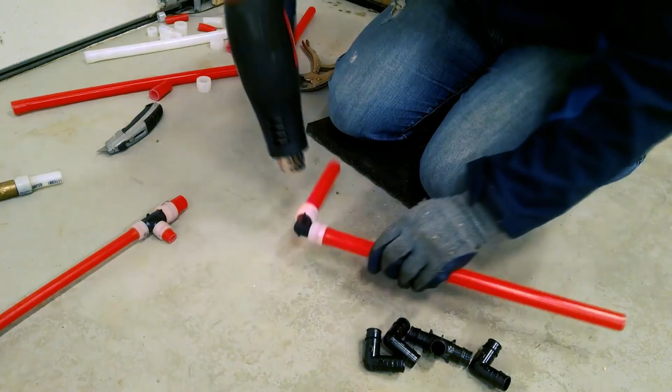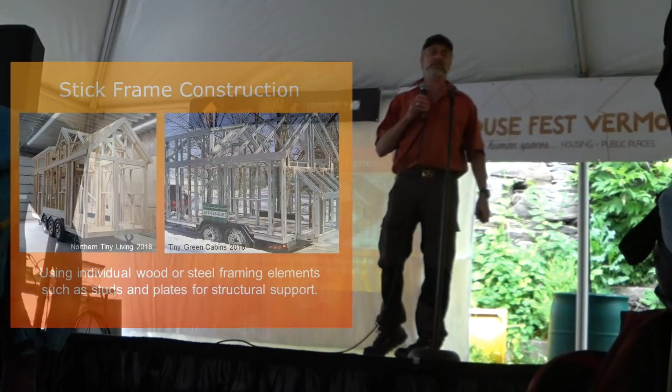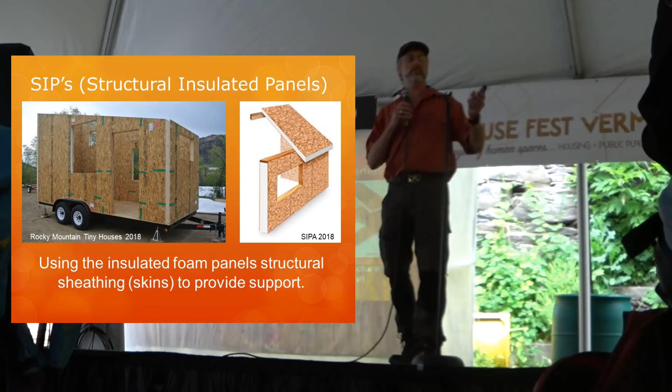There's a couple different ways you can frame up or build your tiny house walls. One is stick frame, with either wood or metal. There's some advantages and disadvantages of both, and we'll take a look at them. The other would be using SIP panels, structural insulated panels. Typically those are foam filled with a skin on the outside acting as the structural element for the walls. We'll talk a little bit about their advantages and disadvantages.

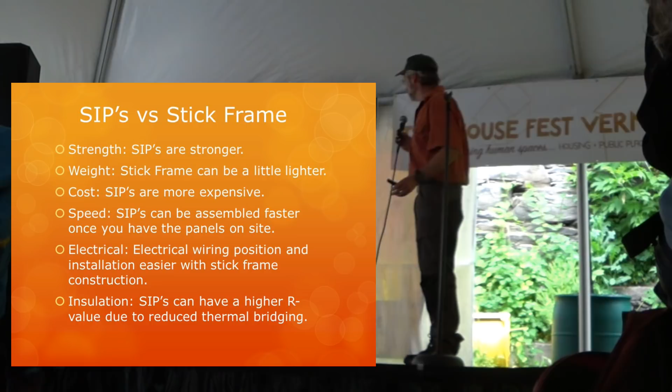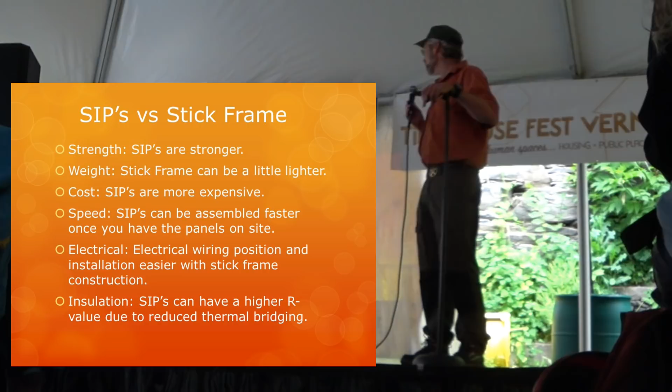In comparison to SIPs versus stick frames, SIPs are stronger just because of the way they're built. They're all integrated and tied together a little bit more, so it tends to be a little stronger. Weight, you'd think SIPs might be a little less weight, but actually folks who've put together their tiny houses have found that stick frame typically is a little bit lighter than a SIP panel. Costs, the SIPs are going to be more expensive. They're pre-manufactured, but on the other hand, they go together quicker because basically you're just screwing some panels together instead of framing up the entire building.

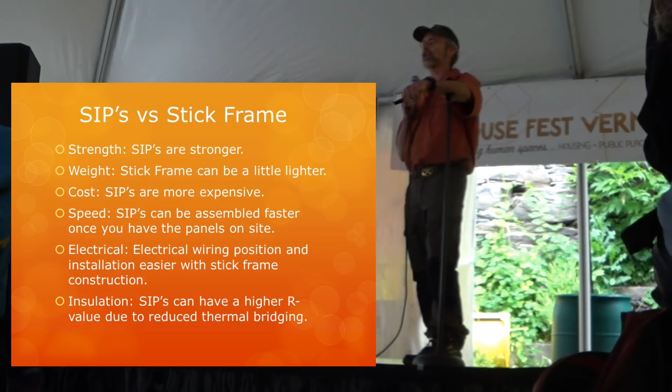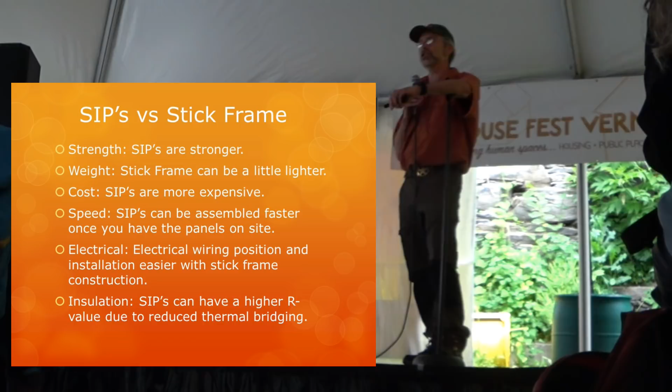The electrical, if you're going to change things down the road or modify things, it's a little easier with a frame because you're running it through the studs itself. With the SIPs, you'd need to route out some new channels or do some surface mounting if you're going to change where your electrical locations are. And in terms of insulation, SIPs can also have a little bit more insulation. Sometimes they're a little bit thicker, and we'll get into some of the different insulation systems as well.

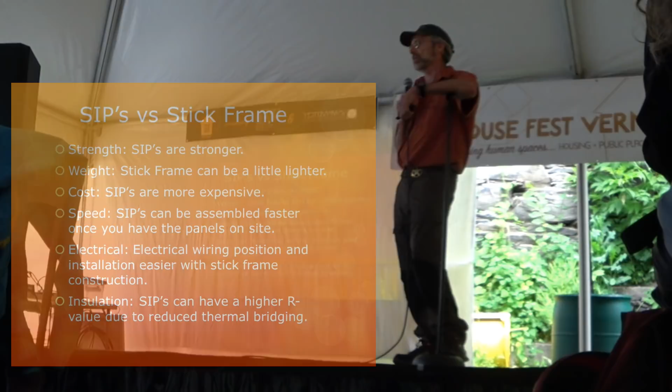So wood or steel? Well, in terms of weight, structural steel frame can be 40 to 60% lighter than wood. So weight sometimes is an issue, maybe your trailer has a maximum weight rating, so sometimes steel can be good for that.

But in terms of cost, wood is typically 2 to 3 times less expensive than steel, just because of availability and it being easier to put together. A lot of the structural steel frames, people are buying basically the frame and then building the house up from that, and that's going to certainly add to the cost a little bit.

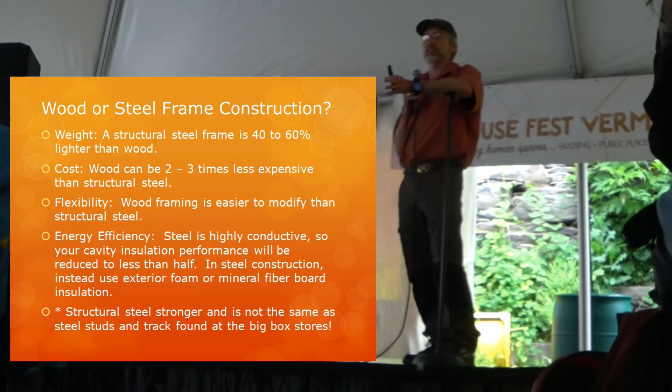Flexibility, if you need to reposition a window or change the structure itself, wood is a little bit easier to modify than steel, particularly if you have somebody prefabbing the steel system. In terms of energy efficiency, we have to remember steel is very conductive, and the rule of thumb is if you put your insulation into the cavity of that steel frame, you're going to reduce the insulation by half. So that's a pretty big downside.

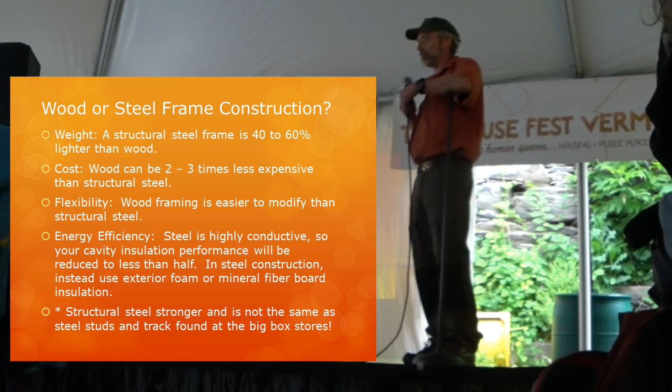So typically when we're doing steel frames, we'll actually be looking at exterior insulation systems like exterior foams, or board rock wool panels would be another option. When we talk about structural steel, we're talking about something different than if you go down to Home Depot or Lowe's and purchase steel. There's a couple folks here with some steel frames you can take a look at. Those are pretty beefy in comparison to some of the other ones you might see.

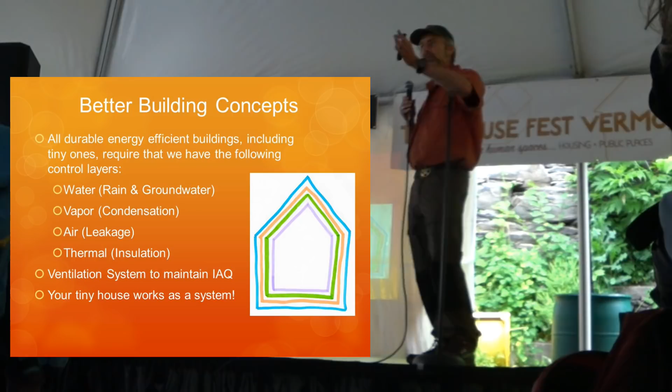When we're building these things, we have to think about this as your wall system, your roof system, and your floor system as well. They're all kind of layers that need to go on there. So we need to control and keep the rain from getting into our siding. We don't want things to be rotted out.

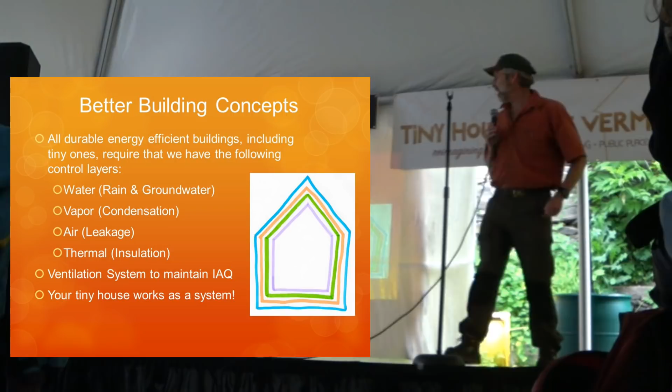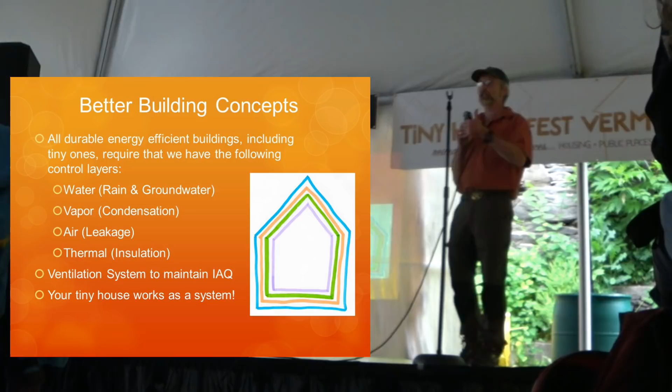We don't want things to be rotting out. We may need to take into account vapor or condensation, and that will depend on the type of insulation we're thinking to use. Air leakage—we don't want the thing to be drafty, and we want it to be more energy efficient, so we want the envelope to be as tight as possible. We're going to be putting our thermal insulation either inside the frame or outside of the frame, depending on our insulation system. We want to make sure we have a ventilation system because we don't want to create problems. We want a real tight, energy efficient envelope for comfort and energy use, and yet a healthy indoor environment by having our active ventilation system.

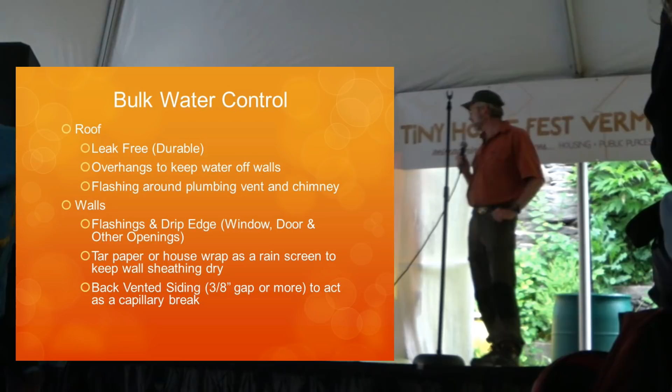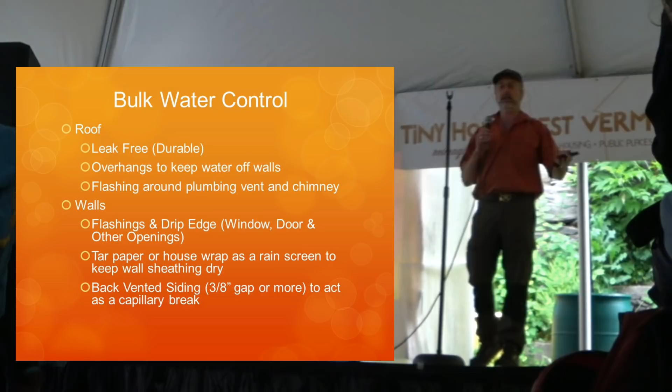The tiny house, as all houses, needs to work as a system. Bulk water control—we're going to make sure we've got flashing and drip edges on our walls, around the windows and door, and other openings. We're going to use some tar paper or house wrap on the other side as a rain screen. So the rain screen means any water that gets through our siding will have the ability to run down the side of the building without getting into the frame, into the sheathing, and rotting things out over time. And then we're going to back vent our siding.

We have some products over here. If you take a walk around, you see these fuzzy looking black things on the outside of the building—that's the rain screen. It gives a capillary break so that when water comes through the siding, at some point it now has a pathway out.

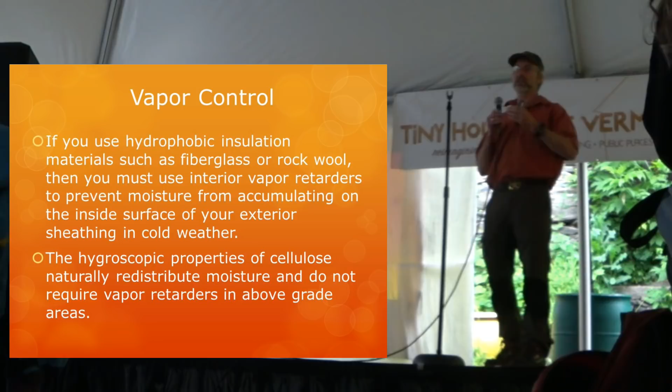Vapor control depends on the type of insulation we're using. If we use hydrophobic insulation like fiberglass or mineral fiber, we have to think about vapor control, because if we don't, we're going to have problems with interior moisture going through our insulation, hitting the exterior sheathing, and condensing. If we're using something like cellulose, which is hygroscopic, it has the ability to disperse this moisture and not let it form on the outside. So if we're looking at fiberglass or rock wool, we have to think about putting a vapor retarder in there. Otherwise, we're going to have durability issues over time, particularly in cooler weather.

Air leakage control—again, we don't want drafts coming in during winter when the wind's blowing. We want a nice tight building with air leakage control because we don't want uncontrolled air leakage bringing moisture to areas where it could potentially condense and turn into rot and mold over time. The easiest method we've found for creating an airtight building assembly is to air seal the exterior sheathing, because there you have the least number of joints.

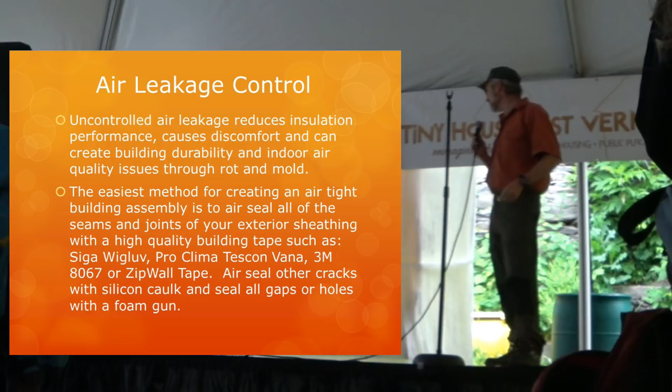So you're going to be doing your air sealing typically from the outside of the building, before you put on your rain screen, and maybe even before your building paper if you're using plywood or OSB. Typically you're going to use some real high quality tapes with an acrylic adhesive, applying these at the joints or seams of the building before your siding goes on. Then you're going to air seal the other cracks with caulk and gaps with a foam gun—again, making that envelope as tight as we can.

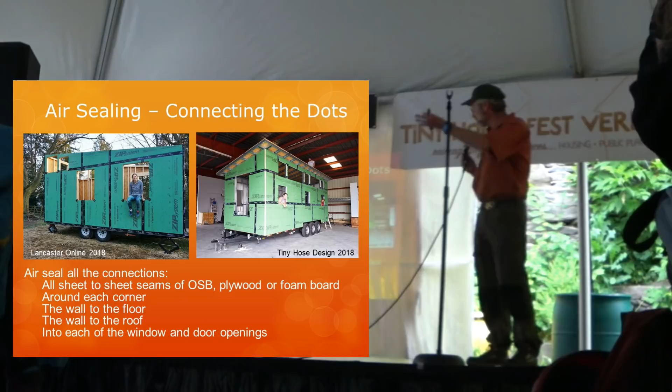So air sealing is all about connecting the dots. We want to make sure that before we cover this up, all of those seams are sealed. We're also going to make sure we tape around the corners of the walls, the wall to the roof, and the wall to the floor. We want all those connections all the way around—continuous from the top all the way to the bottom.

Insulation options: you could have bats, boards, sprayed on, or blown in. It's very difficult to actually achieve good cold weather performance, and also really hot weather performance, with bats.

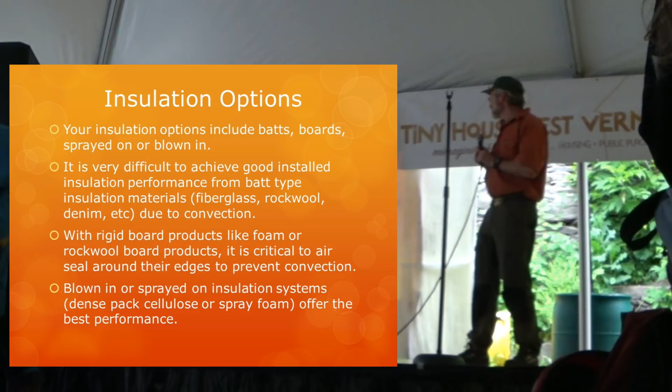I'll talk about convection a little bit here. It's a real issue. We've done a lot of work with the infrared camera, and on a cold day, it's not uncommon for your wood element in a wall to actually outperform your insulation because of this convection that's going on there.

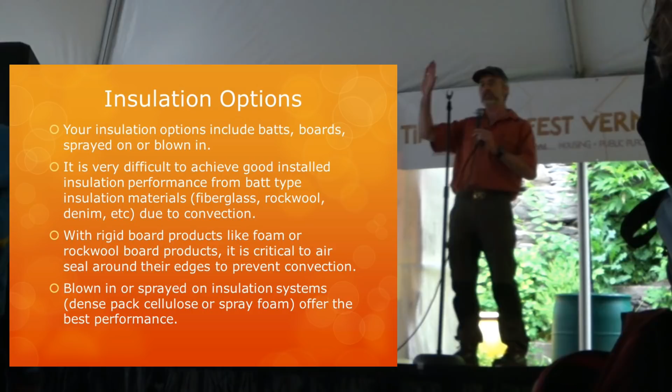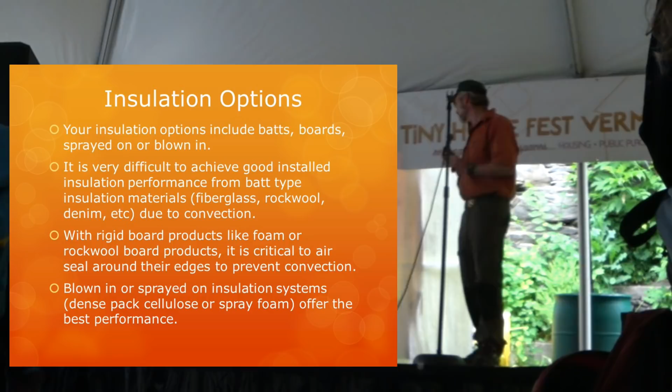Rigid board products like foam or rock wool board, when we're putting those on, we also want to be air sealing or making sure those connections are nice and tight, with no gaps around them or under them where we could get convection bypassing our insulation. Then there's blown in or sprayed on insulation, like blown in dense pack cellulose, or spray foam, spraying on open or closed cell foam.

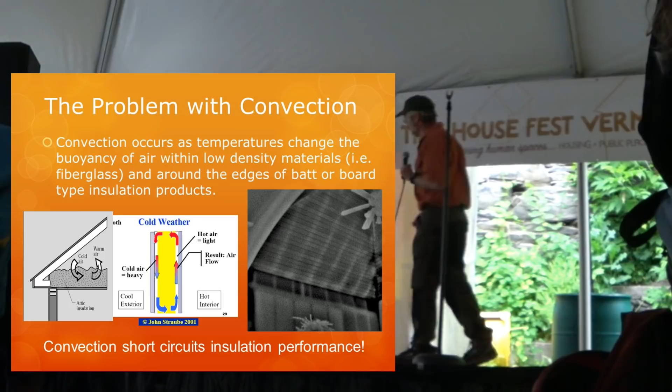Real quickly, the problem with convection is whenever we use a batt, what we find is that in the wintertime we've got warm air on this side, it heats up the air at the interface between the batt and the inside wall. It starts to rise, the air becomes more buoyant. You have the same thing going on on the cold air side. That creates a convective loop, which is basically bypassing your insulation. And when it does that, you're not getting the performance out of it. You're going to have issues.

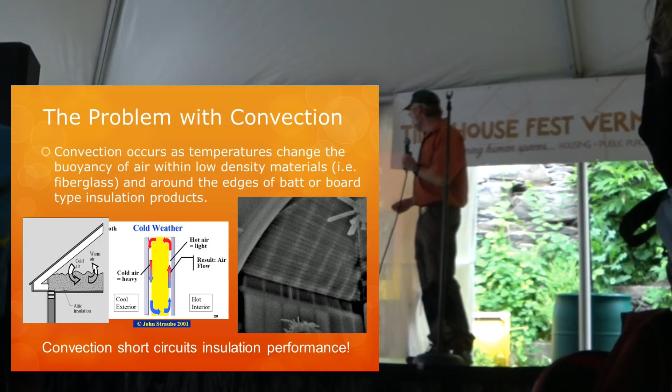You can also transport moisture and other things around that. So batts are just not the best option for this. Even if you try to install them really well, there are some issues with that.

Some of your insulation decisions: is your insulation value stable over time? A lot of these foam products use inert, lower conductivity gases, but unfortunately these things do seep out or leak out over time. So they experience what's called thermal drift.

Also, can your insulation help increase the tightness of the building? Some of the denser products, like the foams and the dense packed cellulose, will actually slow down or prevent air leakage from getting into the building. I don't want to say they're always the perfect air barrier, but they can certainly help the tightness of the building.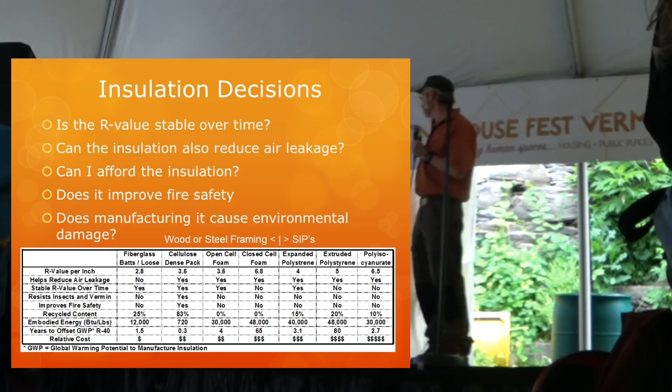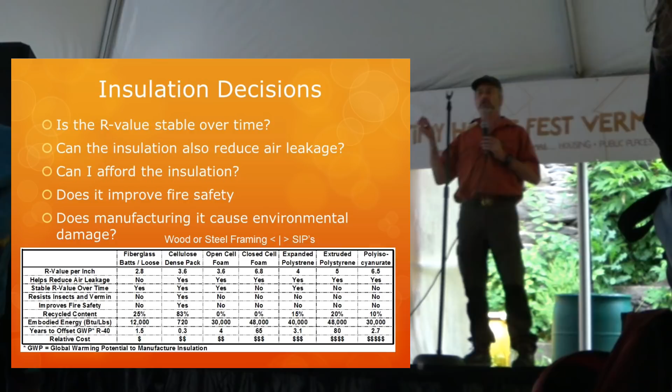Does it improve fire safety? The one issue I'm a little concerned about these days with some of the foam products in particular is they are very flammable and produce a lot of toxic combustible smoke. So if you're using foam in these buildings, we have to make sure we have a 15-minute barrier in front of them to give you some protection inside the building. The nice thing about the tiny house is you're not too far from, hopefully, the doorway there.

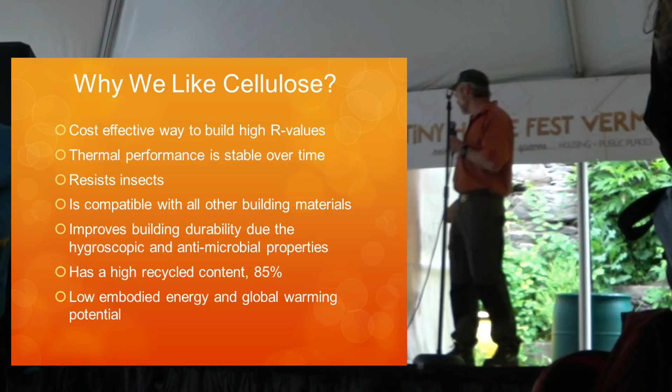So I do a lot with dense packed cellulose. It's just proven to be very, very reliable. It's very stable over time. It's definitely a cost-effective way to enhance or build higher R-value buildings. We've used it in a couple of tiny houses, including a super insulated tiny house I'll show you. It also resists insects, is compatible with other building materials, has the hygroscopic properties we talked about, high recycled content, and low embodied energy.

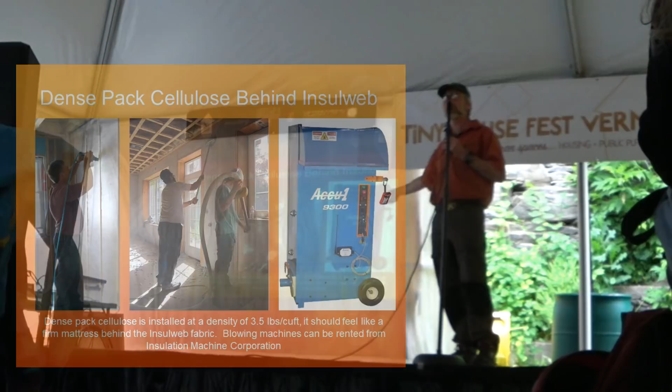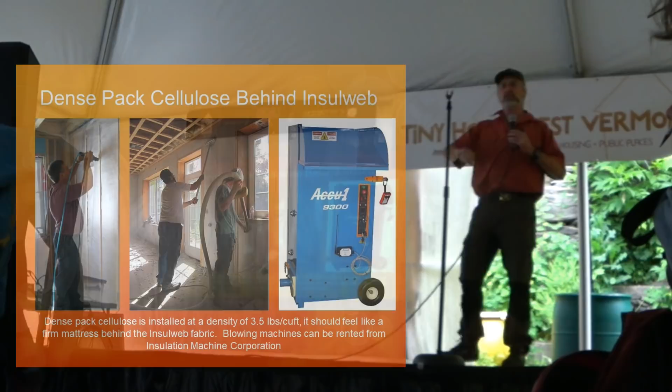Next slide. So if you're going to do cellulose, you'd basically be using a machine such as this. If you're lucky enough to live in Vermont, New Hampshire, or even Massachusetts, we have availability of these machines. In fact, this particular manufacturer, no matter where you are, will rent you a machine to do this. Basically it involves stapling up this material called Insulweb, which looks like the material underneath your box spring or sofa if you lifted it up. Then you're injecting the cellulose in, and we call it dense pack because you're putting it in at 3.5 pounds per cubic foot.

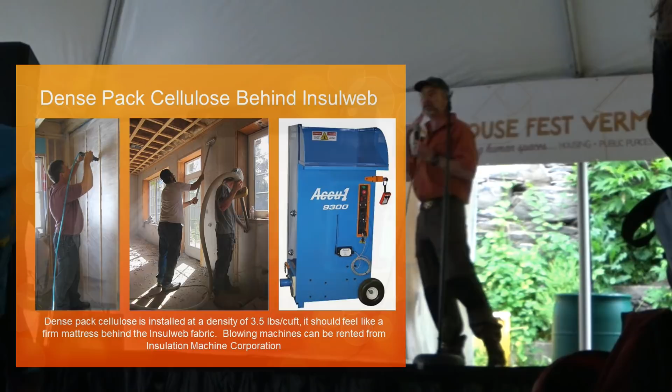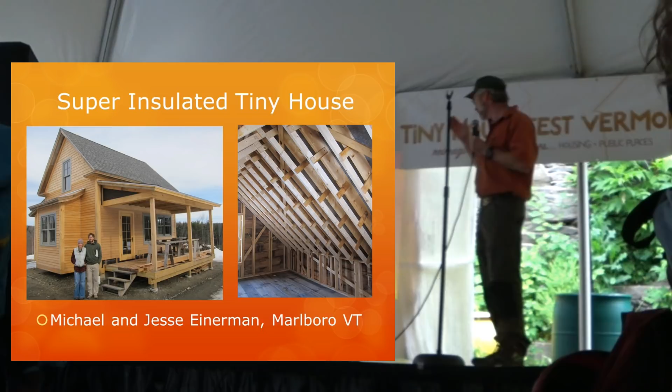This is how we typically handle the roofs on those homes, and the walls themselves were built out with a double stud wall on the walls and the roofs. This proves that even in a little teeny house, don't be afraid to insulate it well.

In summary, we want to make sure the building envelope controls all the things we need to control. We need to control bulk water from coming in. Depending on our insulation, we may need to be talking about vapor. The air, we need to make sure we don't have uncontrolled air movement coming in. The insulation provides our thermal control, and then our ventilation system handles the rest. In terms of our air barrier, we need to make sure that it is continuous.

So if you have your tiny house design there, one way to do it is take your pencil and draw around the insulation layer around the entire building, and then go ahead and draw where your air barrier is all the way around, and make sure that they're all connected.

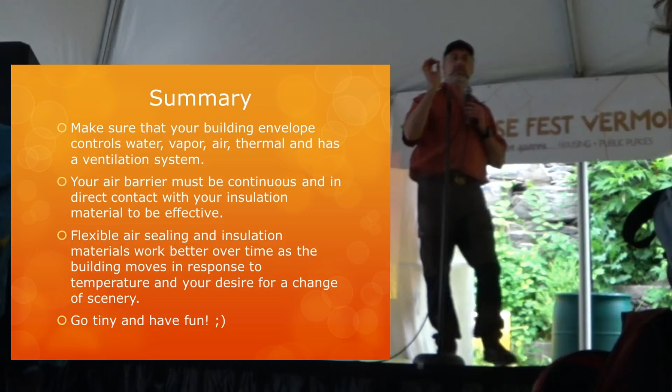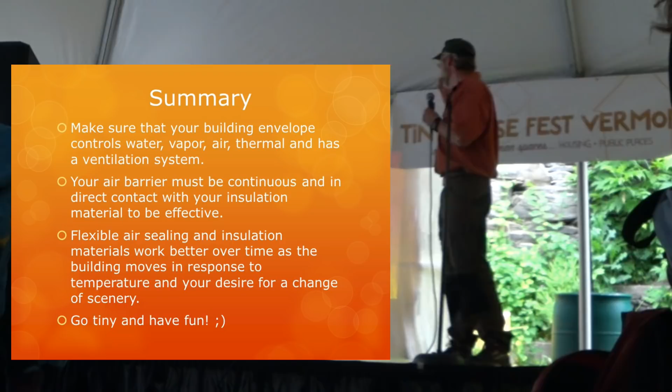The critical thing we found when looking at buildings is that the air barrier and insulation need to be in direct contact with each other. No air spaces, because in these air spaces, that's typically where you're going to get air leakage coming in, and it's going to bypass your insulation. So some takeaways are: you have to absolutely be sure that your insulation and air barrier are in direct contact with each other. They cannot separate. If they separate, you're likely not going to have good insulation performance.

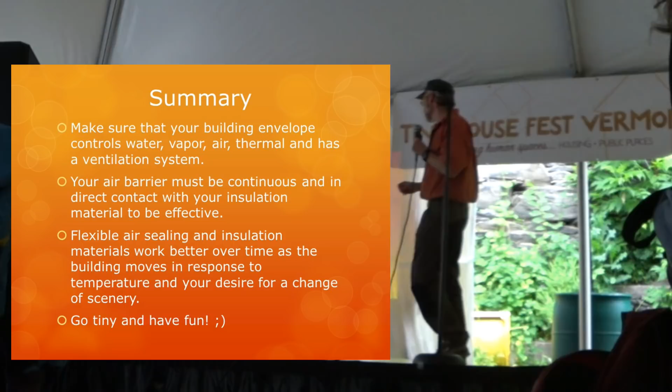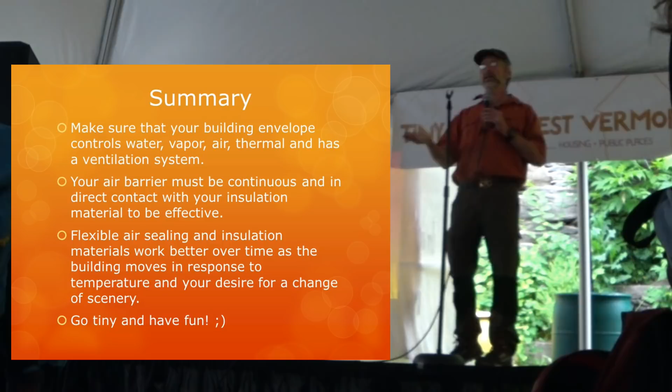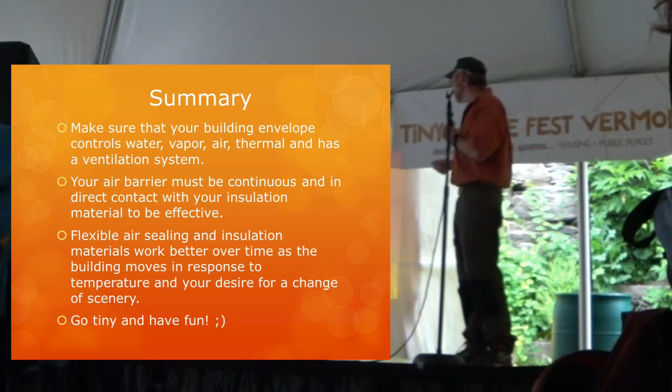Also, we found that air sealing materials and insulation materials, a lot of times, if they're more flexible, they're going to be more durable over time. Again, you may be moving this house around, and if you have something very rigid in there, you're more likely to see things cracking or breaking as it moves around. So when you're looking at air sealing materials, just look for things that seem to have maybe a little stretch to them or a little bit of give, that's a little bit better.

So a little bit about insulation. In terms of R-value, because that's something a lot of people think about—I want the insulation that has the highest R-value—well, the highest R-value products are the foam type products. Closed cell foams typically have the highest R-value per inch.

Some of the issues with closed cell foam is sometimes they tend to be pretty brittle, and I've seen them, after the frame shrinks a little bit, actually crack or break—they'll separate from the frame, and then you could have that convection going on there.

As you come down from closed cell foam, the next one in terms of high to low would be polyiso, which is that tannish kind of foam, typically with a foil facing on each side. That has an R-value of about 6 per inch, maybe a little higher. That product also experiences some shrinkage over time, which you may have read about if you're looking at insulation systems.

Next would be extruded polystyrene, or XPS—that's blue board, pink board, green board—with an R-value of about 5 per inch. Below that would be expanded polystyrene, which is 4 per inch. Or there's the one with Neopor, which looks like a styrofoam cup but grayish. That has graphite added to it, and they're saying that R-value is a little closer to 5 per inch.